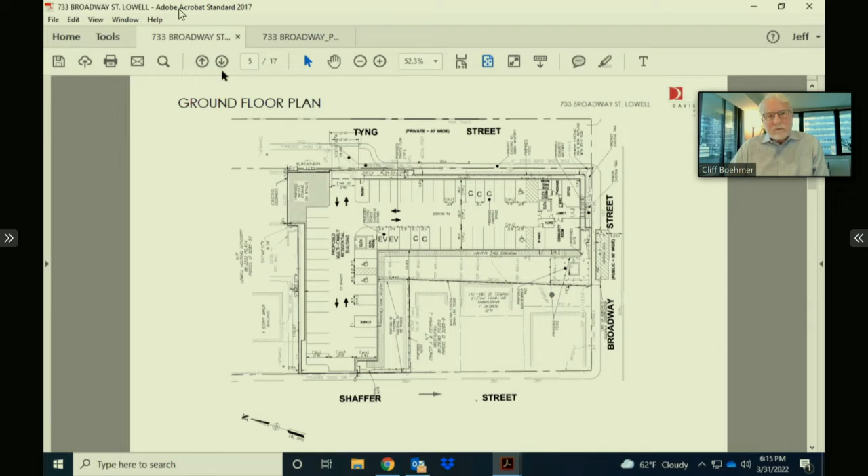The next slide, going up a floor, shows better the pieces we're proposing to preserve in the building. The darkened rendered pieces are existing building that we are restoring. The remainder of the building we are proposing to demolish.

There are a lot of issues. Rich mentioned one issue associated with an adaptive reuse of the building—it would be extremely challenging. We can go into more detail if you wish, but other issues include the fact that the existing elevation along the whole north side is only roughly 2 feet away from the property line, actually up to 3 feet. There are building code issues associated with that—you're not allowed any openings on a building that close. So we would have quite a few technical issues to overcome just to get started, which is a big part of the reason, along with the building code issues, that we've concluded this is the way to go.

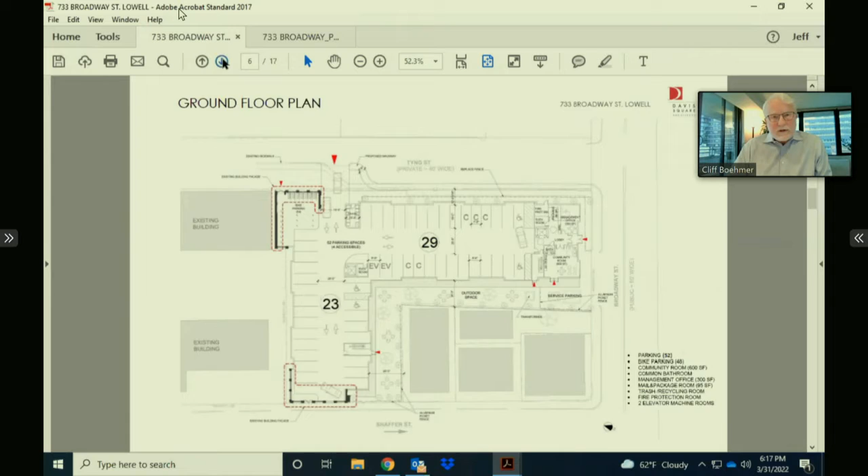Next, you can see how the floor plates stack. There are 2 elevators in the building, one at each wing—one at the inside corner and the other at the southern end where the lobby area is. The primary entry to the building is off of Broadway, and there's a secondary entry off the sidewalk of Shaffer Street as well, but the primary entry is Broadway.

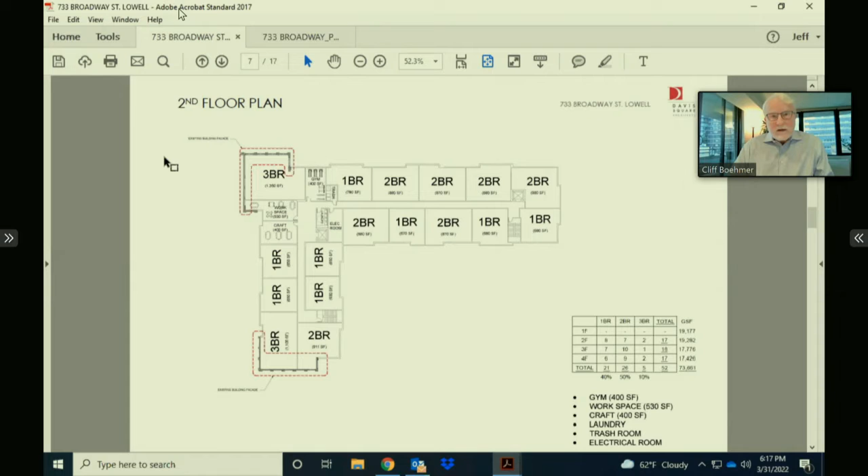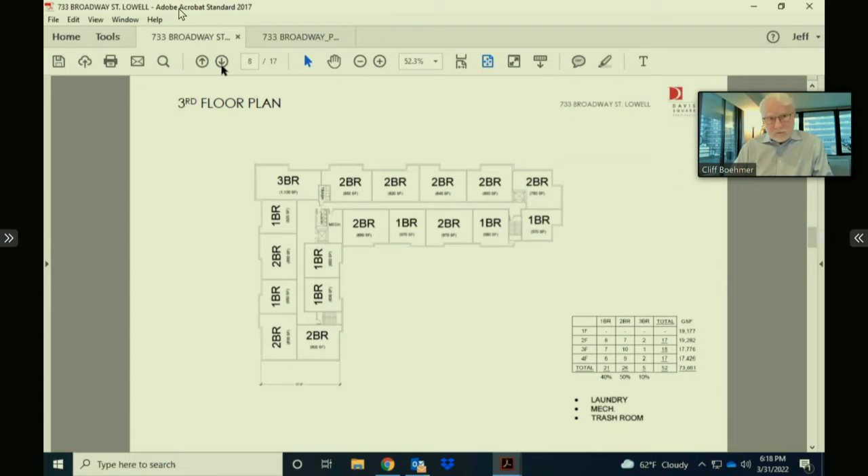We're proposing some masonry in the building, a limited amount, at those two shoulders of the building that are on Broadway. This is the main Broadway entry to the building. We are building new sidewalks along that parking area in front of where those cars are parked. You see in the background our piece of the building that we're preserving, as well as a very long extension of that same building height that makes up a portion of the Housing Authority property.

The materials we're proposing for the building, other than the masonry at the shoulders, are largely cementitious panels, probably a Semtech, or panels that are homogeneous all the way through, creating a rain screen system with reveals as you can see in this rendering. We're combining that with a contrasting clapboard pattern of cementitious siding on the upper levels. The idea was to work with some of the dimensions in the existing historic building, as well as replicating proportions of the window openings for all of the unit windows in the building.

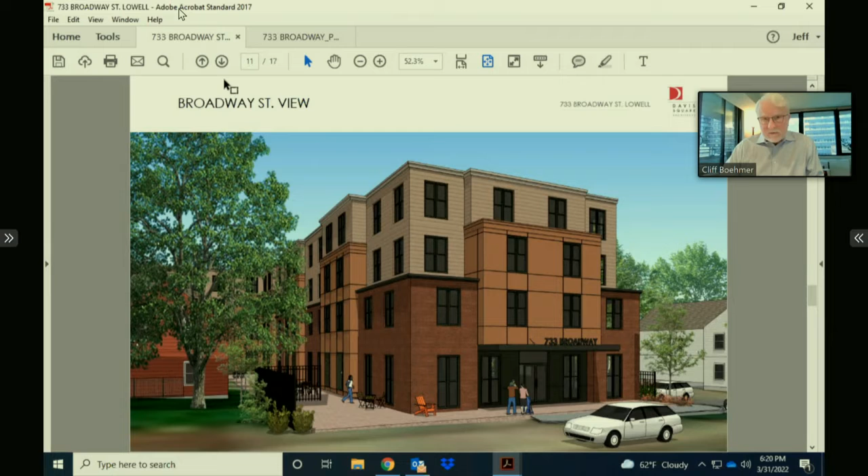Continuing along, this is the view on Shaffer Street. As you can see, there's the preserved part of those 5 bays on the historic building, and then our new building, which is set back from those, so we're preserving around the corner of those bays. As I pointed out before, we've increased the space between that neighbor and our building by about 20 feet, which we think really helps mitigate the scale of the building for the neighborhood.

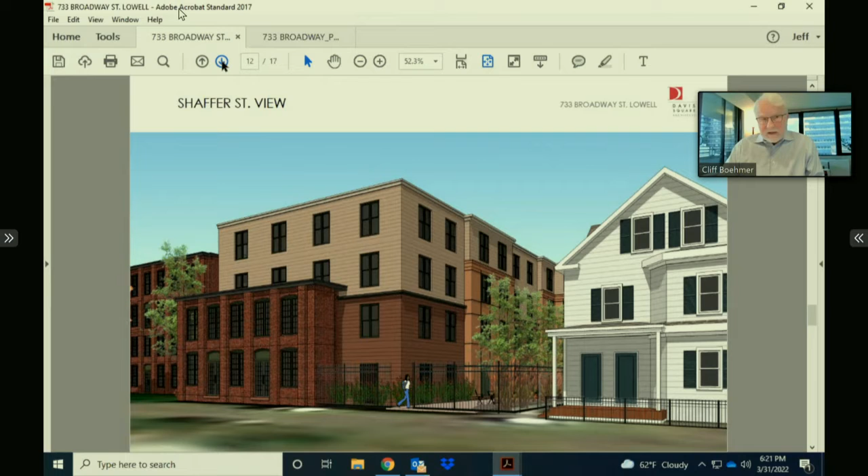Our building is in scale perfectly with the Housing Authority building that's immediately to the east of it, which is also a 4-story building.

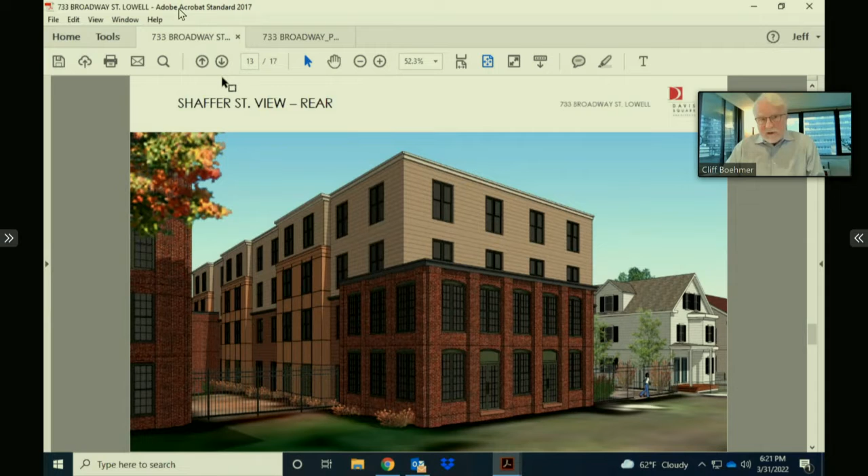That's a view along Tyng Street from the other direction, looking from the north towards the south. And you see how much of the building we're proposing to save wrapping around the corner, going back approximately to where that existing fence line is that lets you into the alley separating the Housing Authority development from 733 Broadway.

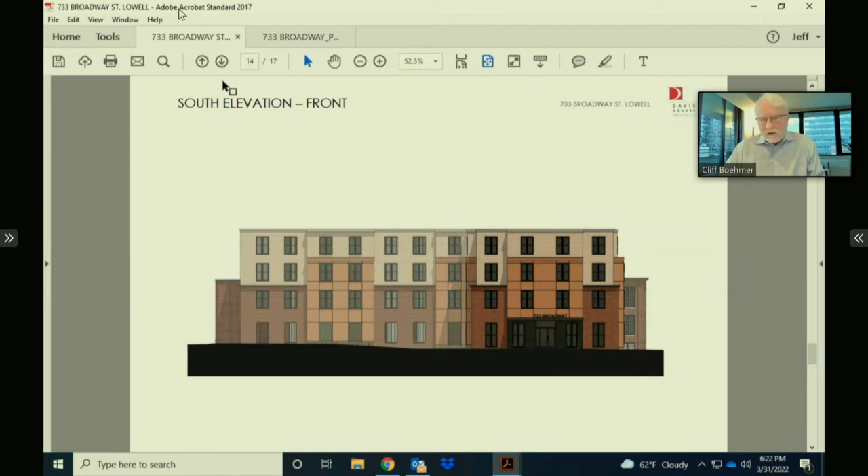Elevations - obviously, because it's an L-shaped building with buildings in front, you'll only see the part of the building to the right, which is the Broadway part. The existing buildings along Broadway screen the rest of it, but this is the notion of the elevation: a similar treatment of bays, the gold color rendered here along with the base piece and two stories of lighter color on top.

That's working our way around - that's the Tate Street elevation. It was important to us to establish a nice rhythm on that street and to carry the dimension of the Housing Authority, which is first our building with four bays, but then the Housing Authority continuing on towards the north. We thought that was a nice connection to make and carry through all the way up to that shoulder of the building right on Broadway, the masonry shoulder.

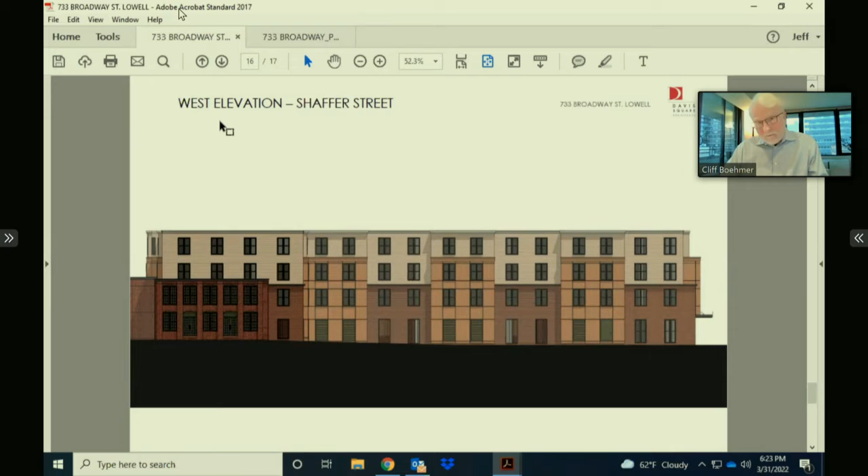And there's the Shaffer Street elevation. Same story here - there are buildings in the foreground for the majority of this elevation, but you can see that we're carrying that same idea all the way around the building.

And that might be the last slide. I think it is, isn't it?

I hope it's okay, I'm sorry it went so fast. Sometimes I think I can't say enough about it, and other times I think I'm over-talking it. But again, I mainly want to thank all of you for the comments we've gotten so far, and I guess I'll leave it at that and open it up to questions.

Okay, thank you very much for your presentation. Is there anyone attending virtually or in person here in Lowell who wishes to speak in favor of this proposal?

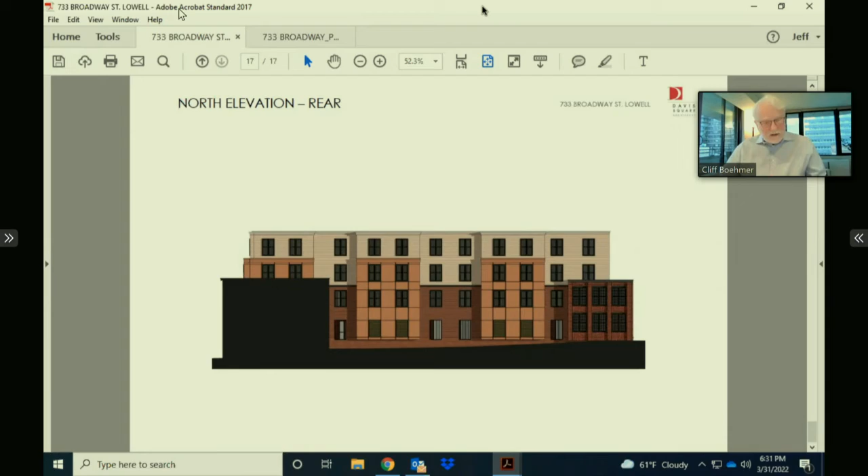You're exactly right, look at that street, it's pretty harsh right now. We are proposing plantings along there, along our new fencing on that side of the street, and we have plantings in the space on Shaffer Street, because we opened up that space between us and the neighbor, we're planting there. If we look at the plan, you'll see that at the end of the day we ended up with quite a bit of open space.

As I started by pointing out, right now it's 100% impervious space. So we're actually picking up a lot of usable space on site and do intend to have a robust landscape plan. At this point I'd characterize it as schematic, but it would certainly be nothing less than what we're showing.

That's great to hear. I'm always concerned when you're demolishing a good chunk of the building, I want whatever's going up to be an improvement over what's there, to balance that out. And like I said, there's not much there now, so if you're engaging a landscape architect and putting energy into that, that's great to hear.

Oh good, I'll tell you a couple other things we're looking forward to. This came from spending a lot of time thinking about the experience along Ting Street, especially knowing that directly across Ting Street is a lot of usable outdoor space that's going to be even better. So we wanted to make a connection with that, which is why we have landscaping on that side of the street, and we're also improving the existing sidewalk.